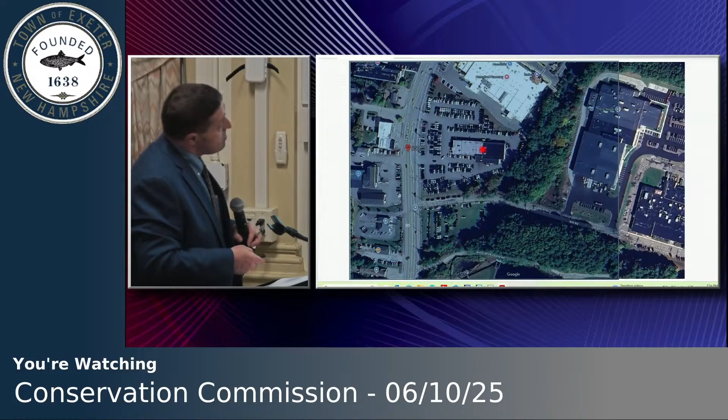Here is the 3 lots all in one survey. As you know, they originally were planning to put a building in here. There was discussion because of the reservoir here and any water that might come down off of that. So they pulled that building off the proposed plans. And now we are proposing to put a building in this area here.

It's another, the preliminary site plan. So this is showing the new building. You can see right here is the existing building with the hash marks around it, overlaid on this preliminary site sketch.

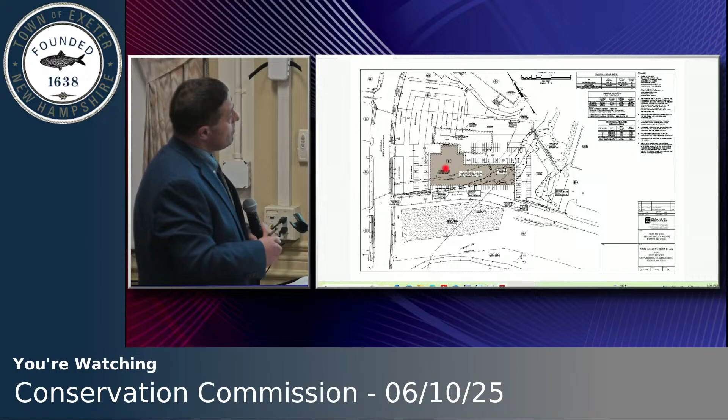This, to minimize impact, they are planning to make this a 3-story building so that instead of trying to expand further, we will have sales in what would be almost like a basement building, so that as you come up Portsmouth Avenue, you'd be able to see the basement part of that building where they could have some sales.

And then, I would assume that would be trucks, dealership trucks and possibly. And then the Jeeps probably would be on the first floor, and then they would have corporate offices on the third floor, or the second floor, I guess it would be. This little bump out would be for drop off for service, and the rear of the building would all be bays that would be for maintenance.

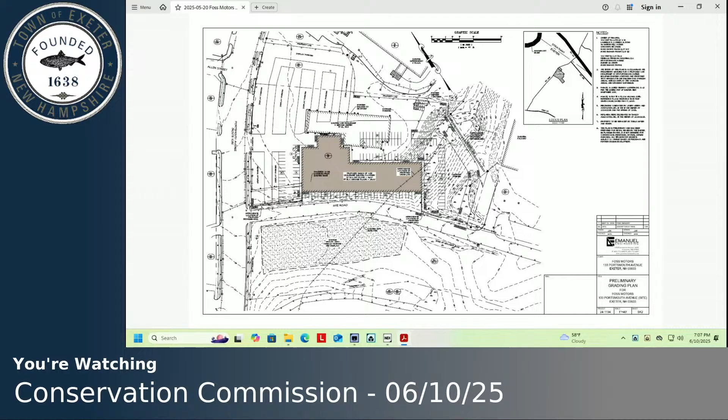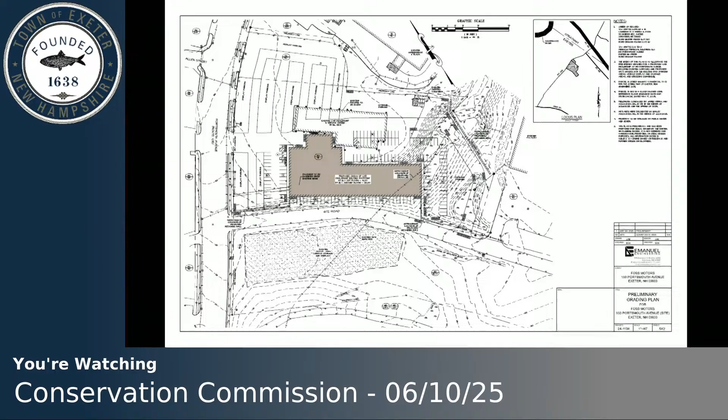So the reason we're here today is because of this wetlands here, and then the man-made wetlands that is the road driveway ditch on this side.

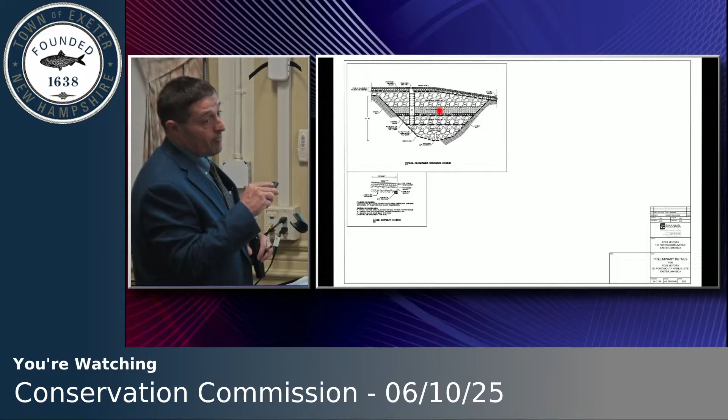And this is what we're proposing to do in the rear ditch, is to design what would be the largest sand filter, to my knowledge, in the state of New Hampshire. The swale in the back is approximately 20 feet deep. We would have stone at the bottom for overflow flood stage storage. It would all be in the bottom. We would have stone on top, so that we could have dry wells and collect the water from the ridge on the site. Let me go back.

Essentially, the site has a ridge that runs around in here, and the water all runs to the rear of the lot. Currently, none of that is treated. So all of that water just flows into this wetlands and then is piped from about here right into the sluiceway exiting the waterworks. So right now, none of that water is treated. What we're proposing is to take that water from this area of the lot and put it into this large sand filter

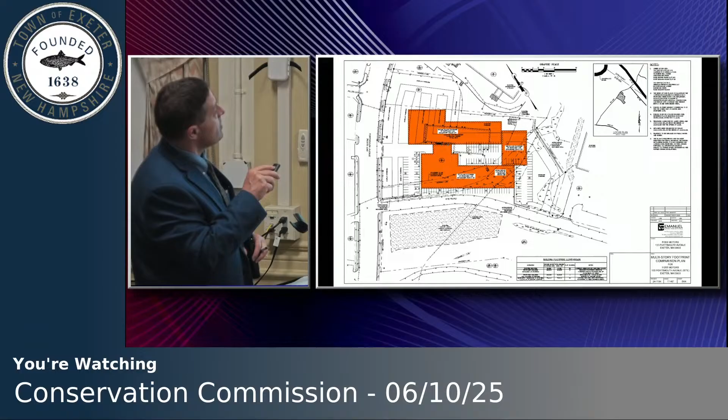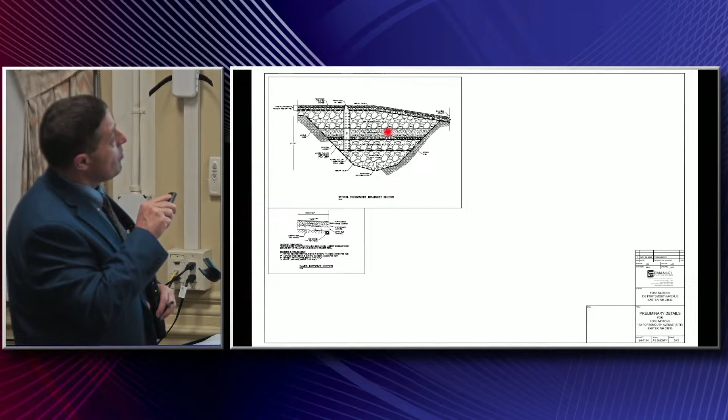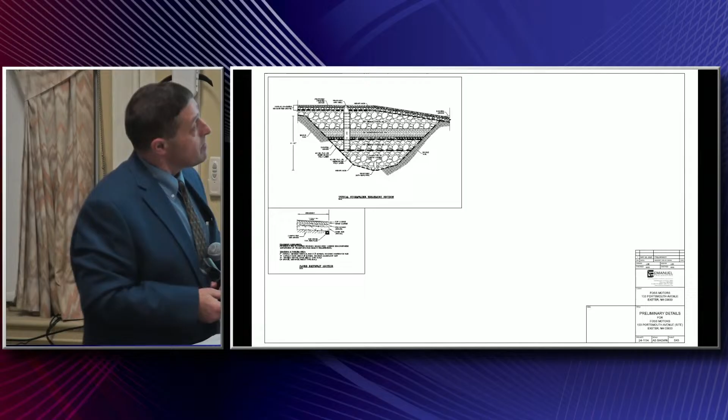here. Traditionally, biofilters are between 18 and 24 inches thick, so we're proposing a 36-inch sand filter. So that water would all have to work its way through this biofilter, where bacteria would grow and treat the water. We feel that this would be a far superior method of treatment of the water that's currently being just dumped into the drainage swale that's behind the dealership and then pushed through the pipe under the former Sylvania parking, or the driveway and lawn that was daylighted into the existing outlet of the reservoir.

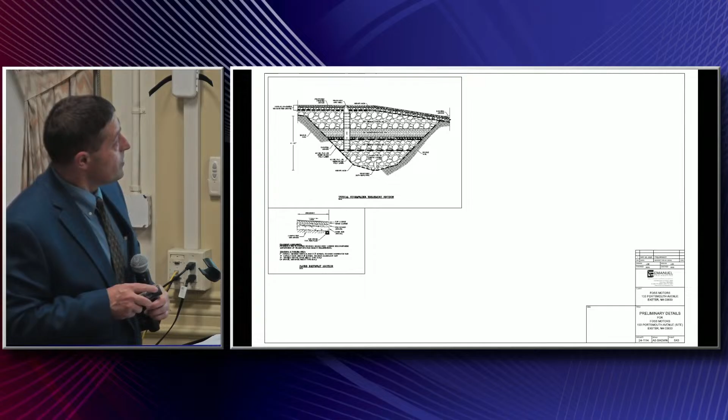So at that point, that's our preliminary discussion. I can talk in more detail of that, but I just wanted to bring that to you and have some discussion about what your thoughts are and where we could work with you on what your thoughts are on the bioswale and how to best move forward in getting the dealership that they need to stay here in town.

And so just for concept, so that it's clear to the board, this is a conceptual design. Your comments to the applicant are non-binding, but it's an opportunity to provide feedback. You're not held to the comments that you make here should a redesign come back. It's really just an open discussion about what you see. That's why we wanted to come here early, just to have some discussion, show you what we were thinking is a way to mitigate the wetlands disturbance that's proposed.

I have a couple questions. Sure. You mentioned a 73,000 square foot building that was down below. Isn't that much larger than what was proposed before? Wasn't it a 20,000 foot? Yes, 73,000 was a combination of the addition and the 20,000 square foot. Oh, okay, all right. So you're still talking about the 20, okay, thank you for clarifying that. So that's 73,000 square feet, and what we're proposing is 83,000 square feet total.

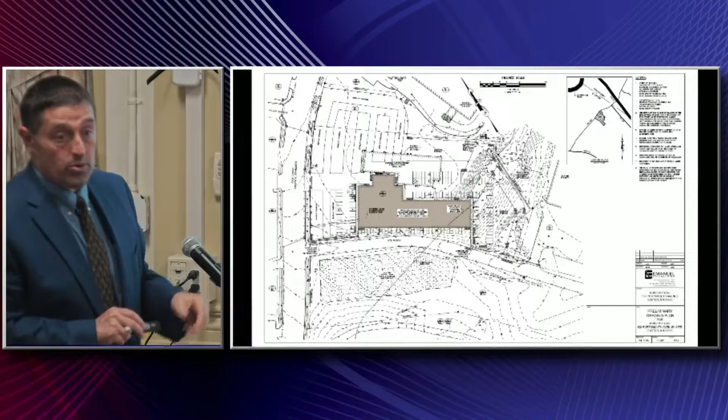Okay. And that's why we're doing it, but in a much smaller footprint. We're doing it in a 36,000 square foot footprint, but by having it multi-story, we're trying to minimize that impact. So, I mean, there is a wetland there. Absolutely. I think you mentioned that the wetland impact is how many square feet? About 15? Honestly, I don't have that off the top of my head, let me pull up my plan and get that for you.

Of the natural, it's 15,009. The man-made isn't totaled, but total with the man-made, so someone could do the subtraction, all wetland impact is 22,050. So then, 7,041 of man-made. And that's direct wetland impact. Correct. Not to mention the buffer impacts. Do you have square footage on the buffer impact?

I don't think we've done that at this point. We're all just in a preliminary stage. Okay. I'm just trying to get a sense of it. Absolutely. So it's about a half an acre total. All right, because it seems like it goes halfway through your new building there, the buffer? Yes. So this is already previously impacted, running right around here. And it definitely would go back into this area.

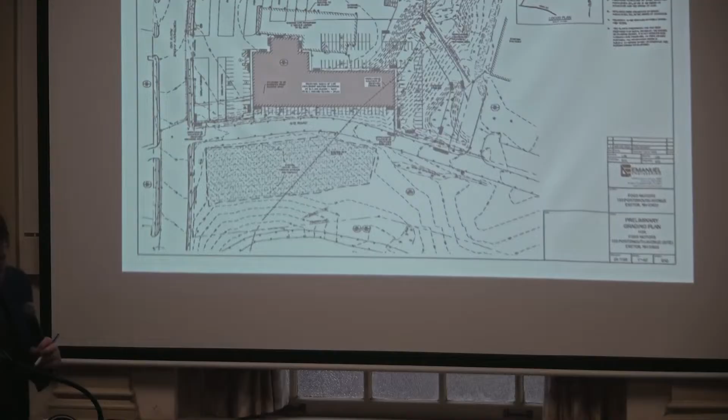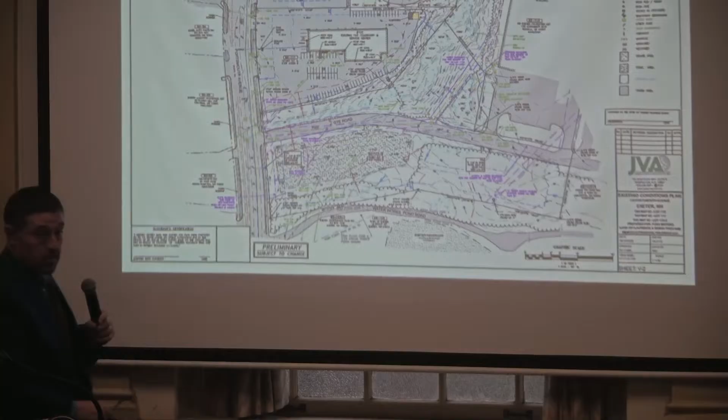Let me pull back to, the buffer here is shown as the red lines. Yeah. So most of the buffer is already an impacted area with fill and pavement. You can see here, this is the extent of the previously impacted buffer. Right, because that's a slope. Yeah, that's a man-made filled slope from the parking lot.

What is the wetland itself? I remember walking the ditch, the man-made wetland, along that road when we did a site visit last year. But I don't think we went up beyond to see that wetland that's impacted there. There's a drainage ditch that runs down through there. We went up and looked at some of the repair work that was done previously for Hannaford's. It discharges to the top of that.

Starting at the old Route 51, when the state rebuilt that, it's all been regraded and rebuilt down to basically our property line, about here, all done with riprap and gabions. They rebuilt behind the Hannafords when that was put in. We went out and looked at that, and it's all been touched as part of the drainage swale that runs off of Route 101 and the old Route 51, the start of the bypass. Holland Way. Yes, I'm sorry. So that's a drainage ditch, you're saying, that wetland that you're impacting.

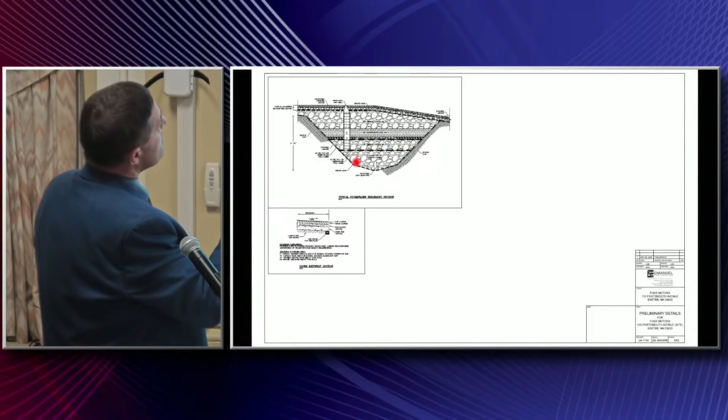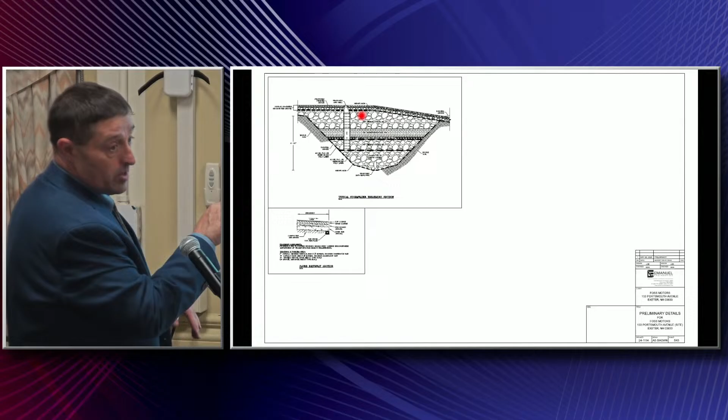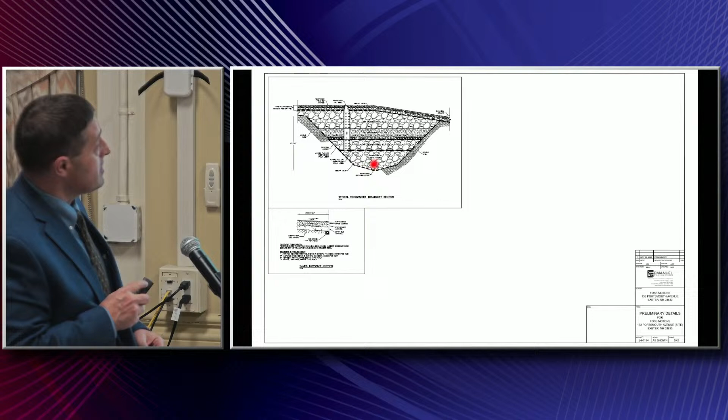So, you look at this, this is actually a pipe, the extension. We're gonna make that perforated. Most of our bioretention work is done with perforated pipe, so the water can flow into those rocks and then slowly drain out. That's the water that's coming from upstream. And then any water coming off the parking lot and in the new areas would go into this rock area, which would be a storage. And then we'd put in a 3-foot sand filter to treat the water. So it actually has treatment to it before it goes into the pipe where it's going to daylight down on the outlet of the reservoir.

Wasn't the new parking lot on the south side also going to drain back into that area? I honestly, I didn't design that, so I can't tell you. Do any of you guys remember that? I probably have a copy of it if we needed to. I believe it's all going to be porous pavement. Yeah. So porous pavement traditionally has a similar section, but much smaller and much thinner. Because I remember that head wall you're coming right up. Yeah, it's going like up to that head wall. So how does that all mesh, I guess?

So the town planner did receive a field modification request to change the outlet. I don't know if a decision has been made on that. I don't know the status of it, but there was a request to do some changing there. So, okay, so it is going to play some role in what happens here. Yeah, I apologize that I don't know this for sure, but I believe it was outletting directly instead of outletting north of the GTE road.

So by having this storage, we're creating the storage so it'll slowly go down through the sand filter. This will take hours to percolate, and that makes it so it's delayed, so it comes out at a slower rate than what goes out today. So we will actually reduce the flow leaving the site. We haven't done all the drainage calculations, but I've never designed a sand filter with 3 feet of sand. The most I've ever done is 2 feet by AOT regulations. So we were planning to have it a little thicker because of all the extra pavement that we're going to be pulling towards it. And then making it, like I said, an extra thick stone layer for storage above and below.

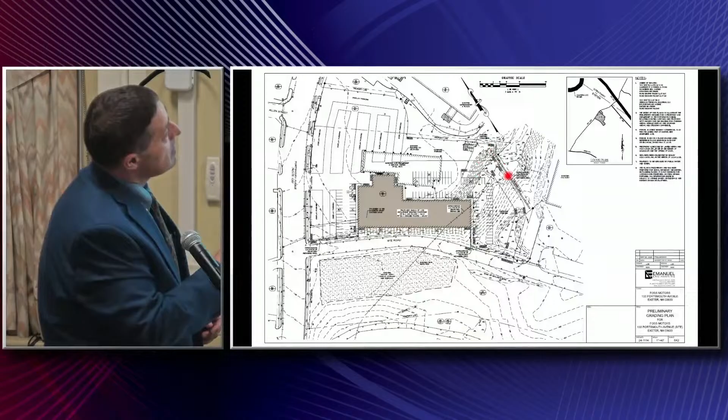Bruce, it's not entirely clear to me where physically that is on the plan. Can you point that out? Sure, actually. So this whole area will be the sand filter. But all of the notes say storage. Yeah, this is under a parking lot. Okay, gotcha. So we're trying to make it so that it's actually being used and treated so that we can use the area to its fullest extent. Because we're going to have access here for back and forth traffic with the dealership and access around the building. This is going to be down at the level of the driveway here. So this is all drive-in into the basement or first floor.

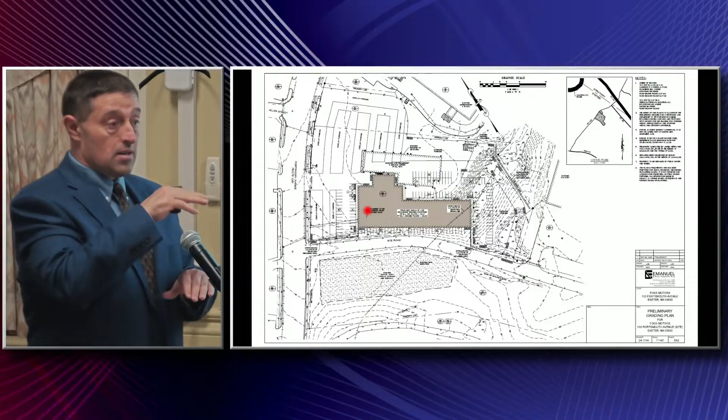And the other 3 sides are all going to be at the second floor elevation. So first floor, second floor, third floor. Yeah, I think it is. Maintenance. So those standpipes are going to be coming up through the parking lot. They're like catch basins, basically, but they're dry wells so that they can release the water and spread it out through the stone basin underneath.

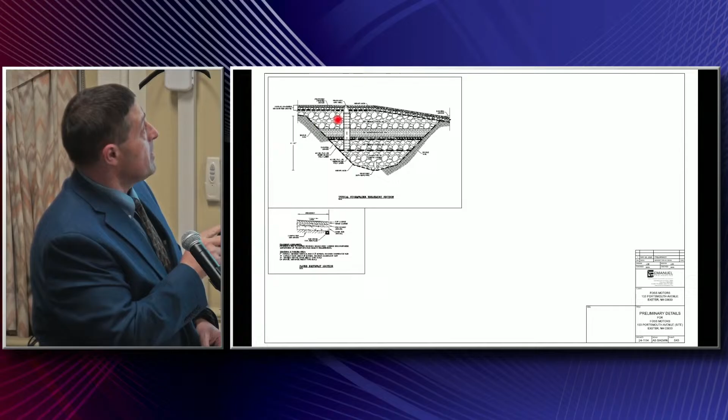Now, what filters the water so that eventually that sand doesn't get silted in? Well, there's a couple things we'll have to do through the full design process. We'll have to put some sort of inlet protection up here. But the rocks themselves are the biggest chunk of that, it won't be able to get down to the sand. But fine particulates wouldn't go through that? Well, we'll have to work on that at this stage right here and have a sump of some sort into this dry well. It may be that we put a second catch basin adjacent to it and then have the catch basin itself be with a sump and then have an overflow into the dry well.

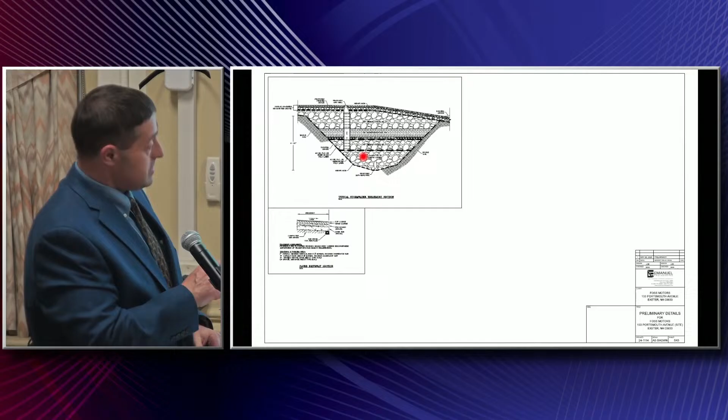Like I said, we haven't 100% designed that fully because this whole system, we needed to get some sort of, we're going to the planning board also Thursday night. So we think this is a pretty unique system.

And wanted to get some feedback from the commission and the planning board before we would go forward with a full design. Now, you said this will potentially be the largest such structure. Yeah, I don't know of any others in the state. There could be bigger ones. I'm not trying to say no, I've just never heard of one that's 20 feet deep. I'm just curious if there's a smaller one that you're familiar with and how that is functional.

We design these on a daily basis. This is basically a porous pavement section, but just so much bigger, that's all. It's just a scale so that it gets more time for treatment going through. Additionally, if we have 3 feet below it of stone, we have not gone to alteration of terrain yet. We might need to do what they call an ISR, which is an artificial wetlands that would be below grade for denitrification. So we'll be working with DES on that.

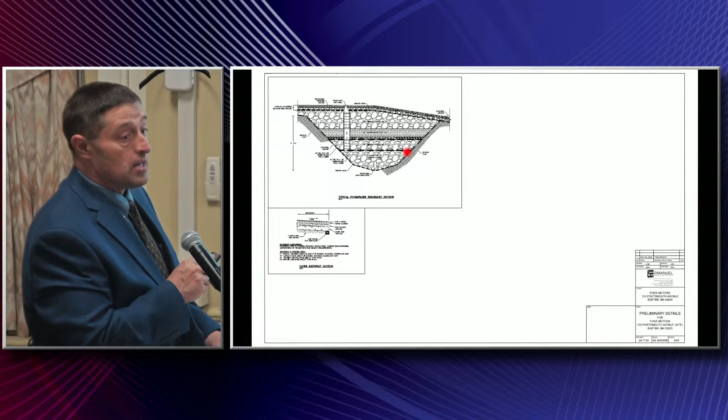The sand filter is an aerobic process where we take nitrogen and convert it into nitrate. And then if we need to have a denitrification process, that would be here and that would be anaerobic. And you do that with pool liner, basically, is a simple way of calling it. And you let the water sit in that, and it goes anaerobic. And then the nitrogen will go off as nitrogen gas back up to the atmosphere, and you will have cleaner water going back out.

Like I said, we've designed it so that we could do that. We just haven't shown that on the plan yet because we'll be working with DES on that part of the design. We've done similar design for TurboCam up on Barrington, up on Route 9, on a recent facility that we did there. I would say our office park has very similar style systems. We've done it on multiple car dealerships around the state. Almost every system that I design at this point, I'm putting in a bio-treatment system so that we can really clean the water.

If you just put it into a pond, the way traditional systems are, you're really not, in my mind, treating water. You need a nitrification process where you can have bacteria just like we do with leach fields. That's the surface area they get with a sand filter, the surface area compared to the volume. You get much more surface area running through sand than you do with rocks. The traditional septic system has rocks in it. If you think about something the size of my fist or the tip of my pen, you could put so many more of these tips in that area, you get a lot more surface area.

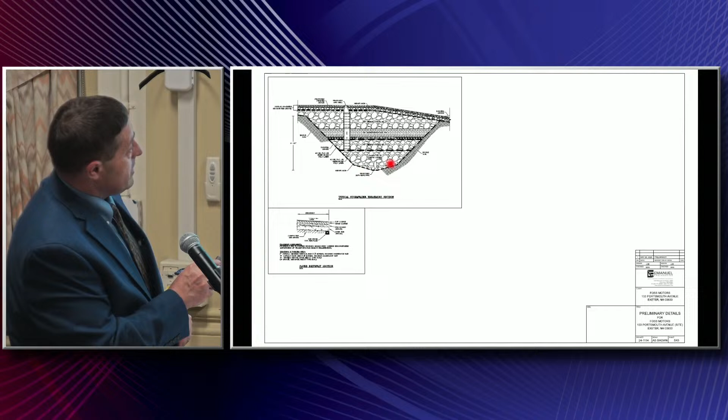Just one quick question. The sand filtration system, as you're calling it, will the drainage from above Holland Way come through that filtration system? It will not. That's why there's a bypass underneath with the pipe, by extending the existing pipe. But in a larger storm event, it would come into this rock area where bacteria would also grow, just not as efficiently as the sand filter itself.

Okay. I was hoping to get some water purification from the drainage to improve that water quality. I thought if it was able to utilize the sand filtration system, it would remove more nitrogen coming from the drainage from the north side of Holland Way, which would vastly improve the water quality entering the sluiceway, which gets into Wheelwright Creek, which gets into the Squamscott, which gets into Great Bay. All trying to reduce nitrogen. Thank you, though. Appreciate it.

I was looking at the third hole at Exeter Country Club, looking into that creek over the weekend, thinking about that.

Yeah, I guess that's my concern too, is you are sort of extending the culverted section. So we already have a long culverted section across that parking lot and down across Waterworks Pond Road. In general, we want to remove these long culverts rather than add additional culverted sections.

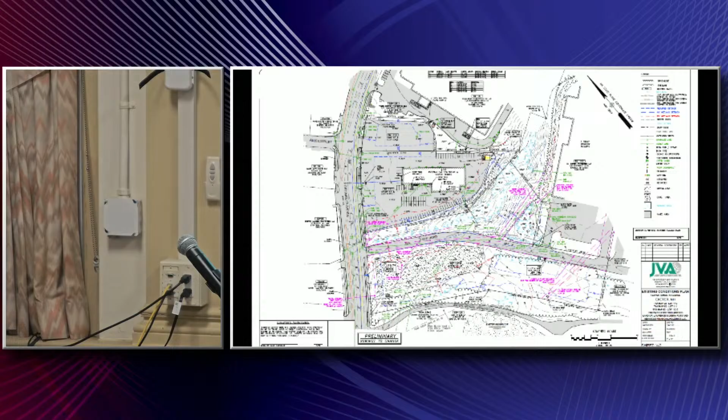I think there might be some grading. There may be some minor shoreline grading. Yeah, I guess. There's a little strip right along the edge of the road, the driveway. Here, let me go back to see that. One of the lines is the shoreline. So right here is the shoreland. So there's a little strip right here. Okay. But it's very minor in this versus putting a building here at this point.

Yeah. Like I said, Foss Motors is trying to stay here in town, and they're not making more land, and unfortunately, they need to expand to stay here. Just out of curiosity, I'm sure you considered this, but that former Toyota property up there, why not do some building up there away from the wetland? Because they still need to have the parking. Right. And this isn't a big enough area to put in the size building that they need.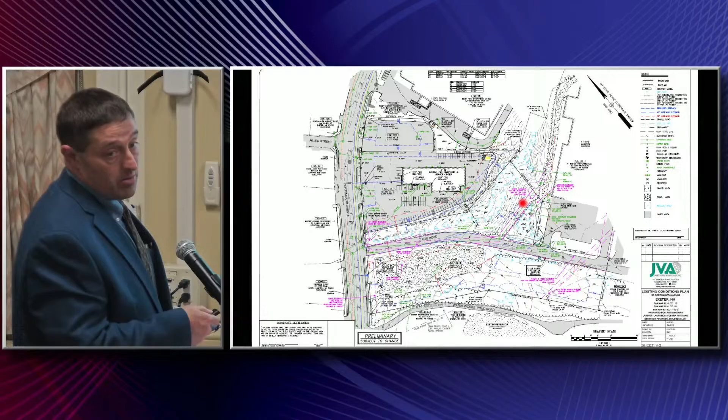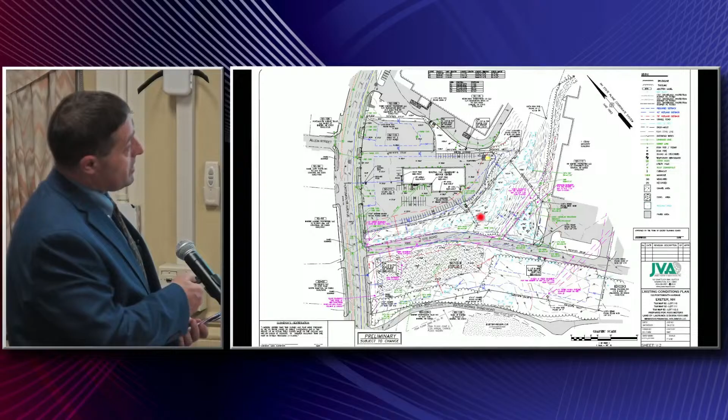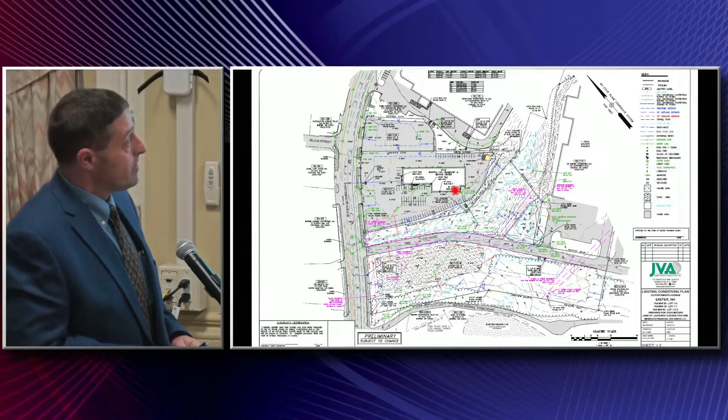Like I said, we looked at just building here, which would also impact the wetland. But the problem is that's almost gonna put them out of business, partially because they would also need to do all of this area, and then you'd just be putting parking over this. So it's a combination of environmental and business. They need to be able to build, and by building here, they can stay in business in this location during that construction period. It's just a practical part of staying in business and building a facility that's big enough to keep them in business here.

Am I reading the plan right, that it essentially paves to the property line? Correct. So in the rear, we're putting up retaining walls. I find that retaining walls, when we deal with wetlands, are always better because you don't have the fill extensions and you create a barrier so stuff doesn't get creeped over it. As I've seen on many sites, fill gets pushed over. With a retaining wall, both town officials and property owners have a hardened location delineated, so the wetlands that continue up do not get touched.

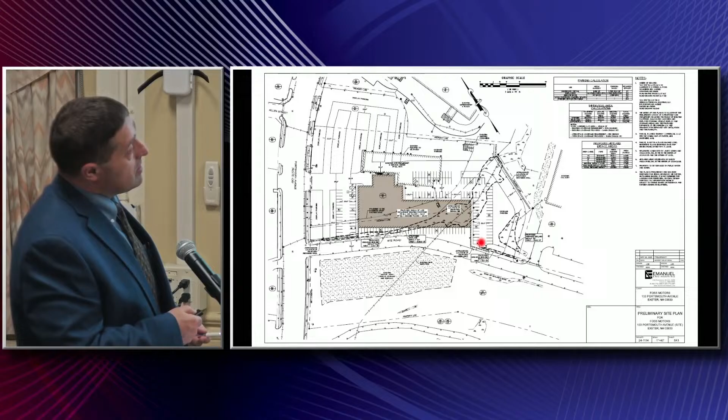We have a little bit of a gap here. There's an existing man-made pond here that is the drainage from the renovated building that's here. We're gonna be taking that and incorporating it into our stormwater system as well. When I went and looked at it, it is not being maintained. It's overgrowing, and that is part of the other reason I like to design these underground systems.

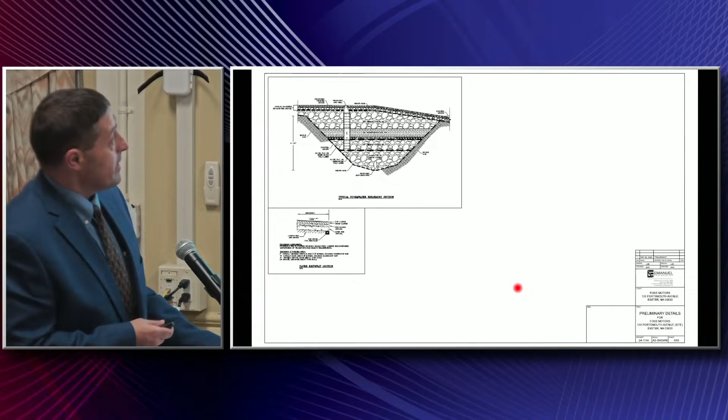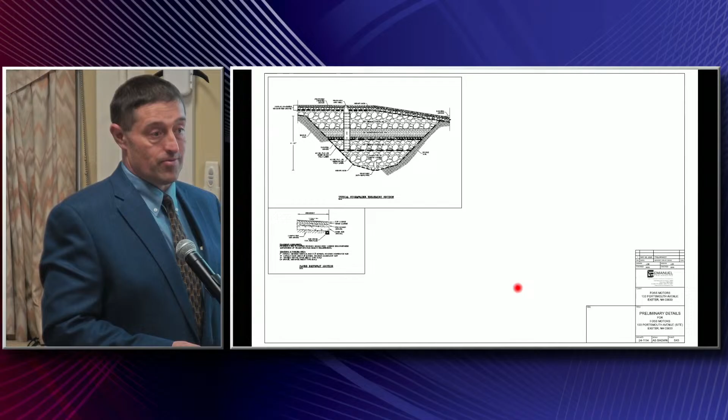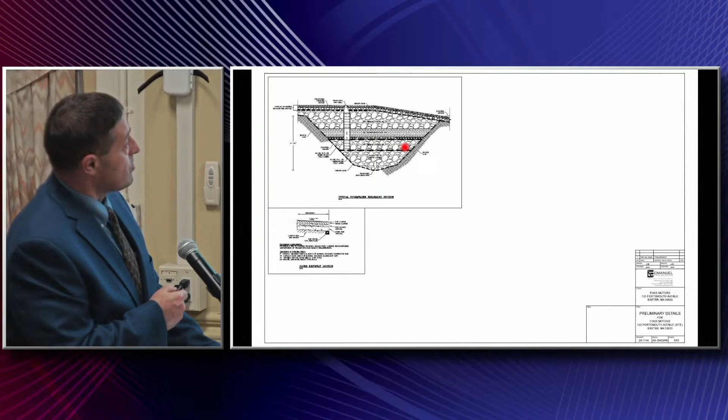Nobody lets trees grow up in them, and the trees don't fall over, tear out berms, and cause flooding issues. They don't have mosquitoes growing in them that create triple E issues or other infestations of new sicknesses. So I like this because it's an enclosed system that has better treatment and doesn't create a surface wetland

that causes other issues. If we create an underground wetland for DES, it's going to be in a controlled environment that will go anaerobic and treat it for nitrogen. We won't be creating a spot where mosquitoes and other bloodborne pathogens can be created. There's plenty of good wetlands in other places that can do that. I just don't like creating them artificially. Sure.

And that man-made wetland in the bottom right-hand corner, that wasn't created for any of the current development that's there, correct? That's like an artifact of the past? It's been there for quite a while, so I assume that it dates back to prior to the existing development, but I certainly don't know that for a fact. Yeah, certainly not to the CNA, because that's on your land there. Okay.

Seeing that retaining wall just got me thinking about what is presently done for snow storage and what's proposed to be done for snow storage? We haven't completely designed, like I said. I would assume that part of this back parking lot would be used for snow storage. It could be taken off-site.

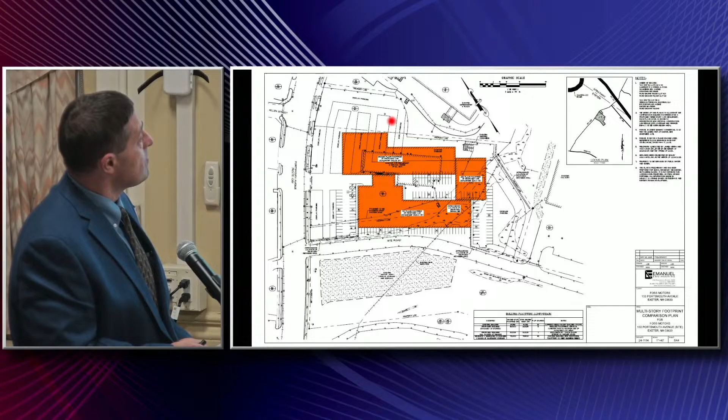Currently, they put snow all around this side of the building. So I would assume that would continue as they have been doing. Okay. But it definitely won't be going over the wall. Yes, we can put that on the plan. Okay.

Yeah, it's a lot of wetland impact. It's hard to stomach a little bit for me because there's no avoidance or minimization here. It's just you're basically filling that entire wetland, turning it into a parking lot. Correct. Parking lot and building. So I get what you're trying to do, but at the same time, it's a significant ask to go along with this.

Yeah, I'll just put my thoughts out there, I guess. I think like you mentioned, it's sort of a complete removal of what's there. I don't think I would recommend trying to claw back little pieces of this or that or the other thing, because I would say the value in any one little sliver of piece just isn't there if you take away the other pieces.

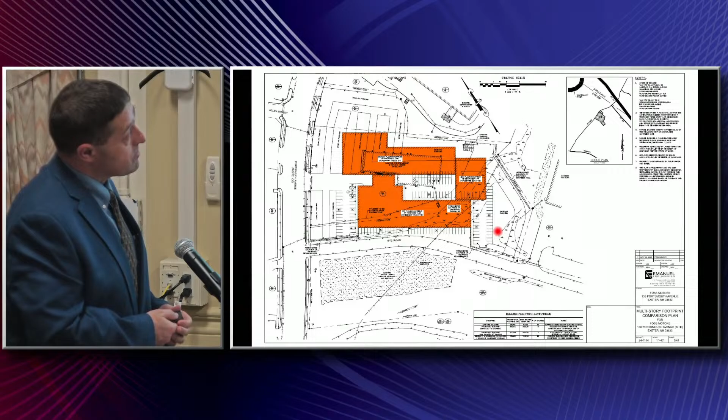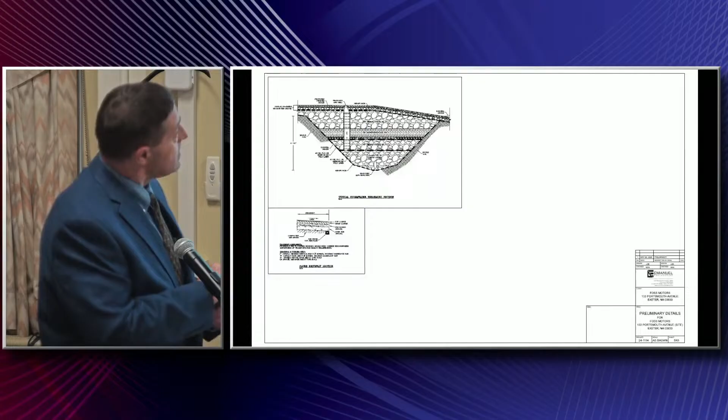Like I said, there's a high point that runs through the site like this. This is all existing pavement that runs out towards the road. So everything in the rear half that runs down and into this current wetland is where we're looking to treat. And that's why we have a thicker rock section in the top than what we normally would. Traditionally, this is 6 inches of stone, and we're proposing somewhere around 3 feet.

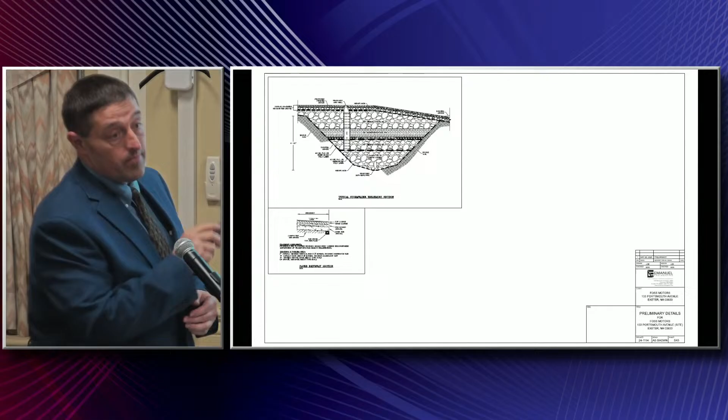Would that include anything coming off the roof of the building? So the entire new building? I want to be careful saying entire until we get into full design, but yeah, as much as we can. The intent would be to drain that. You're going to keep the grade pretty much the same, so you'll still have that ridge flowing in two directions. Correct. But you're going to try to capture the roof water. Correct. And send that back.

Alteration of terrain makes us treat all roof water. Okay. So we'll be treating it one way or another. If we can't fit it into this or make it flow there, then we'll have to add additional treatment in the front for that roof.

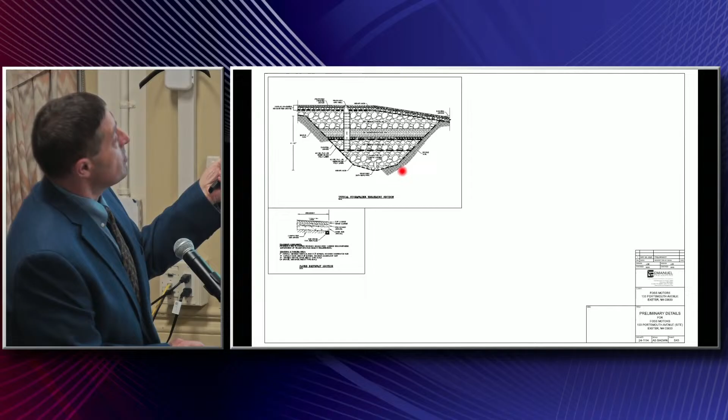Would this send more water? Would it increase the flows through the head wall potentially? No, because of the attenuation through the gravel, by making that pipe perforated. What we like to do is make these perforated so it can also flow to the stone. If it's dry enough, the water doesn't just stay in the pipe, it'll spread out into the stone. And when the water is down in the stone, it'll percolate down into the ground.

Right. But it would be doing that now, because it's in a wetland. Correct. But by holding water up on top for hours, if not sometimes a day, it comes down slower and has more time for percolating and infiltrating down below the pipe, because it's going to drain that water over a longer period of time. Yeah, I guess I get it in theory. I'm just curious how it actually plays out on the ground at this particular site. I believe you, but...

I'd be curious what the outfall of that culvert looks like in that part of the site. I think we want to look at this system. You're significantly modifying it, and you're now creating this giant culverted system. Part of it is perforated, but you're expanding this head wall up a significant way. So I'd want to make sure that whole system makes sense and meets the current design. If that pipe is hanging at the end, why are we building this giant $1 million new thing to have it be this crappy outfall?

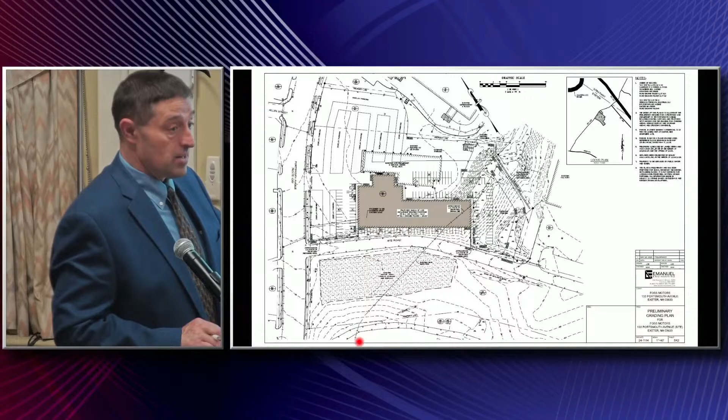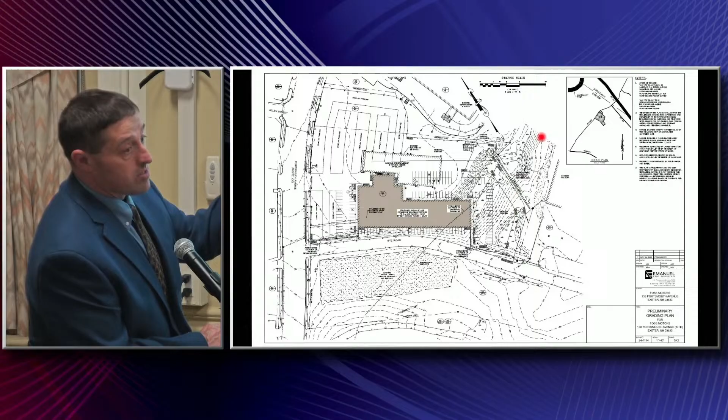I don't know what that outfall looks like. The downslope, you're saying? Yes, the downslope. I'd like to think a little more holistically about this system. So the downslope is off-site, down here, right? And this will be a closed system all the way. There's also pipe underneath 101, under Holland Way, and it's all in man-made structures running down through here. Even behind Hannaford's, it's running through gabions and rocks, just like what we're planning to do. We're just doing it somewhat enclosed in this area.

Yeah, I guess that only furthers my concern, that this whole area is like this. I want to make sure it works. If you're messing with part of it, we should make sure the whole system is working. Because why are you investing $1 million if it's failing downstream? That's just my thought in the moment. I don't know that you would have authority to, but it would be worth the town looking into this whole area, or at least going out on a site walk and making sure it all makes sense.

Anybody else? Oh, Bill, you're muted. There we go.

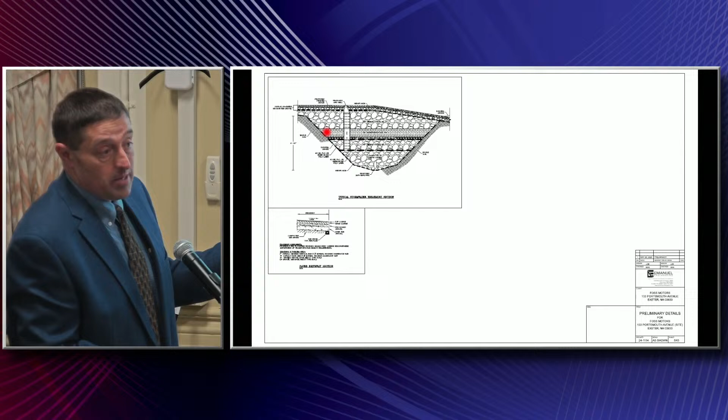Does this system take a lot of upkeep? The system itself does not. What might take some upkeep is the sumps that need to be cleaned out above this. As I said, we haven't designed that system. There's several different ones that are readily available. But it's just cleaning out the sumps that are also part of this system.

And would that be Fox's responsibility? I would think it would be their responsibility to maintain their drainage structures, just like it would be anybody's private property drainage structures. Well, yeah. They installed a beautiful system up at Hannaford's before Hannaford was in there. And the DES gave it 5 years, and then they said they're finished with it, and now it's shot. It's all overgrown and it doesn't work.

That's why I like these biosystems, Bill, because you don't have the vegetation that destroys them. The vegetation is great in a lot of places, in a lot of ways, but anytime you get root systems going into a treatment system, those roots disturb the pipes, they disturb the layers, they cause short cutting through the treatment system. So that's why I like this type of system, because it doesn't have any of those biological impacts from things growing in them and on them. Okay.

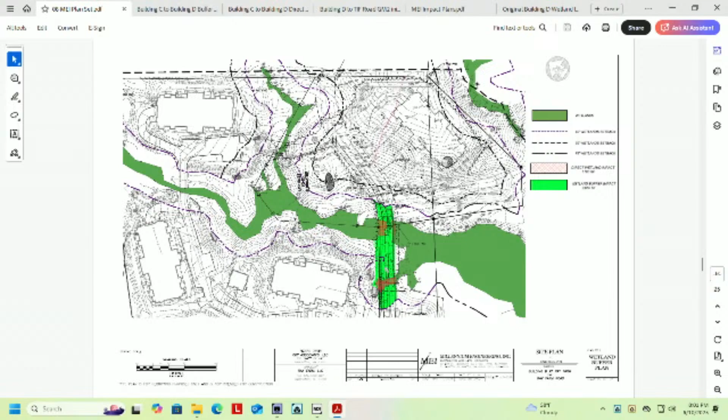This new design, I'll avoid the word concept because it's real, uses the TIF road, which I think was previously considered the preferred access into the rear of the site because it will avoid additional duplicate or secondary wetland impacts affiliated with building C to D, and I know that was a concern previously from the board. We're here tonight to try and get recommendations for both the wetlands and shorelands impacts. This is the wetlands buffer plan, and then the shoreline buffer plan, which looks something like this. The comparison, I will let you direct that conversation, because if I stand up here, I'm going to confuse the world or give too much information. So I think it's better to do directive questions.

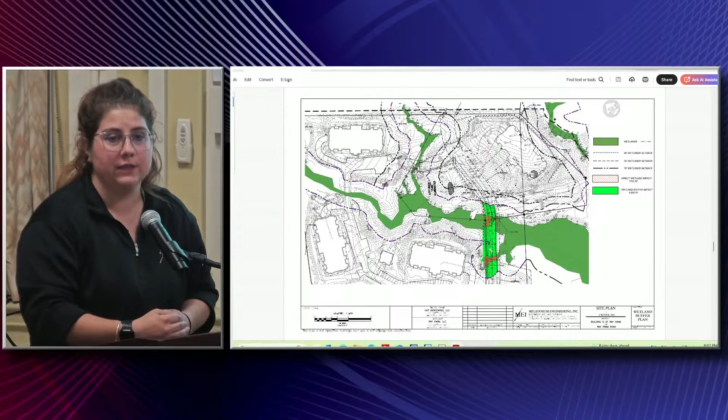But again, the general idea of this revised site plan is it's the same building location from 2022. It's a revised access way. This continues the town portion of the TIF road that already exists, so the town's already accepted a length of right-of-way. It will continue that and then taper it from a 28-foot cross-section down to a 24-foot wide road width for the duration of the driveway through the same area the TIF road previously was going to use, and then derives the rest of the impacts from the parking required and the additional access requests that were required for the site.

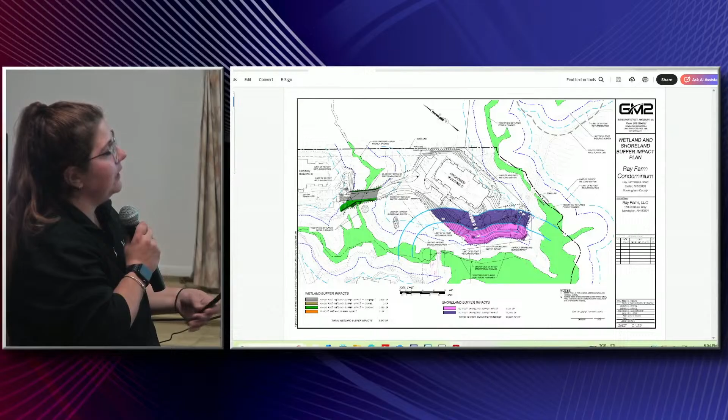There's a couple of reasons for the parking lot reconfiguration. One being that the requirements on the planning side actually require more parking to be on the ground. There are 36 spaces underneath, and in total, we're in the process of determining, but when this originally started, we really needed 72. So that's the expansion of that parking lot out. And then you'll notice that these impacts look similar from the shoreline aspect, where you're still using this downstream slope as a stormwater feature to help with stormwater management and enhancing the water quality from the runoff.

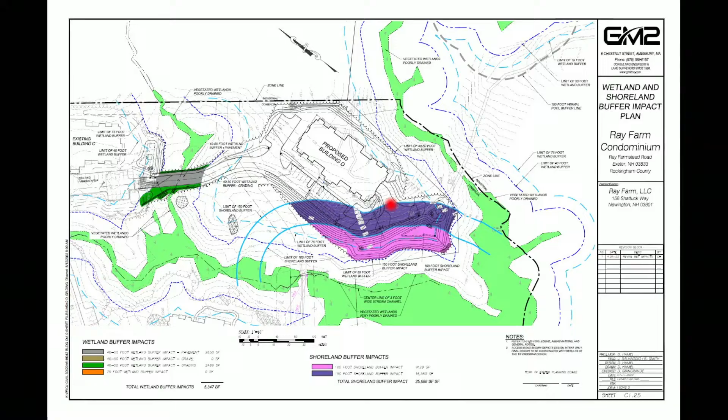In this particular one, the entrance to the underground is on this side, and so yes, there's wetland buffer impact, and that's how we look at it one way, but there's more permanent impervious structure within the buffer in this case because of this turnaround. And so that's something that's different from the new configuration as well. Oh, it's on the other side. It's on the other upland side. Better.

Sorry, I believed that they had created that as well, but they have not. And so if we do, why didn't it go big? Sorry. If we show it this way,

you can see this is the revised shoreland impact plan, where again, here's your TIF Road crossing coming up, and then you have the extension of TIF Road as the main driveway access and some of that parking lot. We still have stormwater management in the 100 to 150 foot buffer, but this entrance has been relocated to the other side to pull it out of the buffer even more and try to reduce that some more.

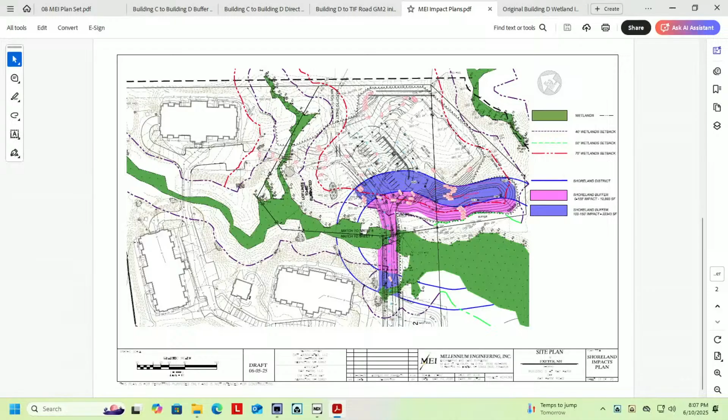Is there currently anything existing on that access that you are proposing? No. So there's a trail, there's a crossing. See how the wetland breaks in the middle of the road right there? It's because there's a trail that crosses there, and I think it's a little culvert or something. Somehow the stream goes underneath the trail section. And there's a lot of trails amongst all those woods. That was a really poor answer on my part, I apologize. So there's lots of trail, but that's it really.

Yeah, you got where I was going with that question. That's why the wetland looks kind of funky in the application. That discontinuous moment is because of an old crossing. I don't know who put that crossing in, but it's been there a while. Wasn't me. Yeah, so you can see the pink between the green is the culvert crossing that we were standing on earlier today, for those who were at the site walk.

I just wanted to add that it is ostensibly a trail now, but there is a culvert in there. There's a metal culvert. Can you introduce yourself? Sorry. I'm used to being introduced in the beginning. Brendan Quigley, I'm a wetland scientist in New Hampshire with Gove Environmental Services.

Andrew will probably remember that I too was involved since the very beginning of this, so I have some insight to things like this culvert. It was originally some sort of access road to this property in the early 80s, I believe. So it's more than just a trail crossing. It is a trail now, but there is a metal culvert in there. I think I said there was two. I might have been wrong about that because I couldn't find the existing conditions plans that I looked at. But there is a metal culvert in there.

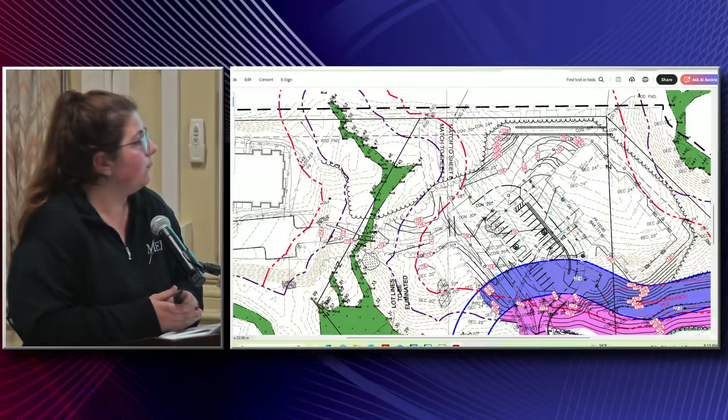And that is about 3,500 square feet of permanent impact within the shoreline buffer zone that will be reduced and potentially can be removed. And so we're trying to realize those changes that may still need to occur prior to fully defining the numbers on both CUPs. Okay. This is the first time I've seen this. So is there land conserved in this? There must be some land conserved in this whole thing? I don't think so.

Well, there's the open space between the 4 buildings that's conserved. There's no separate additional easement that would be made. So when you say conserved, it's conserved by the condominium, in condominium rules? Right. It'd be on the lot as open space. Okay. That would retain some of those areas that are used right now for mountain biking and things like that.

And then my other question is about that sidewalk that connects the 2 buildings. Could you talk a little bit about that? Because it looks like it's going to be 6 foot of pavement connecting one building to the other. Right. So the idea, in theory, is wonderful. And what I've come to realize a little bit more, especially after today, is that these impacts are incredibly large for what they need to be. And so what the owner has asked is that we maintain some type of pedestrian access between building C, which is here, and building D over here.

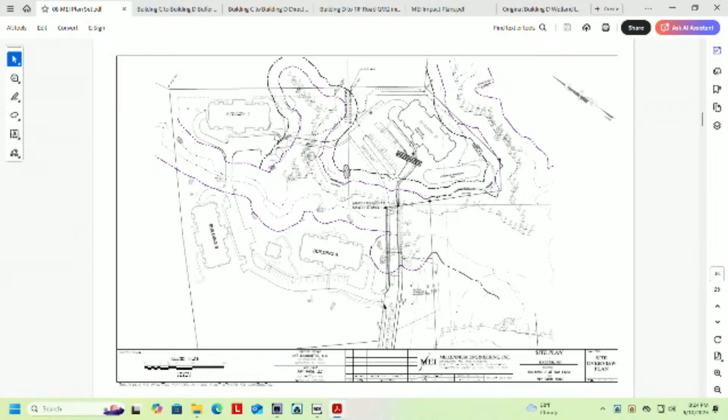I don't think it will go away, but I can't honestly say that we've talked about provisioning for that in what we're doing, because I know what you're referring to is, you come up this way and you go out to Carlisle, but if you come down and around, you end up in the second CKT property, and then eventually that does wrap toward the town forest beyond Commerce, right? Yeah, I think you can get to the town forest maybe two different ways, but through Carlisle, it's more direct to the top of the Commerce Way or whatever that end of that road is.

Yeah, so like I said, as far as to the C3I property, it leads you out to C3I. Yeah, I'm saying the wrong street names, I think. It's okay. No, Commerce is right, because there's the driveway for the cell tower. Right, you end up getting out, you can go from here up to that driveway to the cell tower and out to C3I. Yeah. So people use this, so people will cut through.

Right. I don't anticipate that there will be any restriction preventing people from continuing to use it once active construction is complete. Obviously, there's some safety involved there. But after the fact, I believe it will stay the way that it is with the ability to bike and walk and whatever else through the paths.

So just back to that stream for a second, because I know that it's perennial, supposedly only from a certain point. But as we follow it up, is it pretty well protected by forest? I mean, I guess, again, we're kind of looking at the whole system again, right? Something that shows the whole site. That's existing.

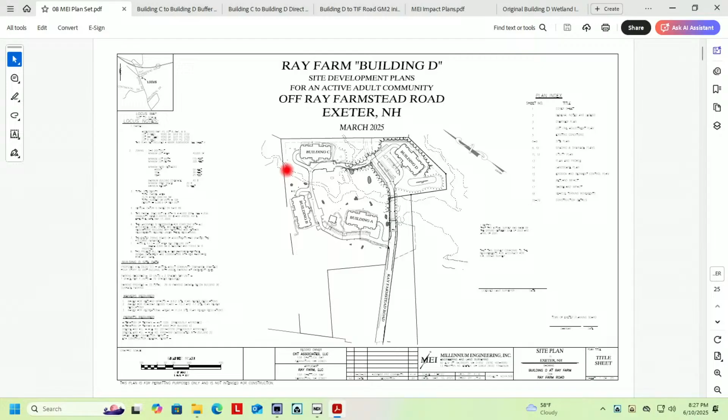So, yeah, where we're talking about now is down here. Watson Brook continues like this, and by the time you get up here, it's really very minimal. Right. But the 2017, actually, I don't know exactly when it was installed, but the initial development located a box culvert here. It's fairly well wooded, and this is a really nice crossing.

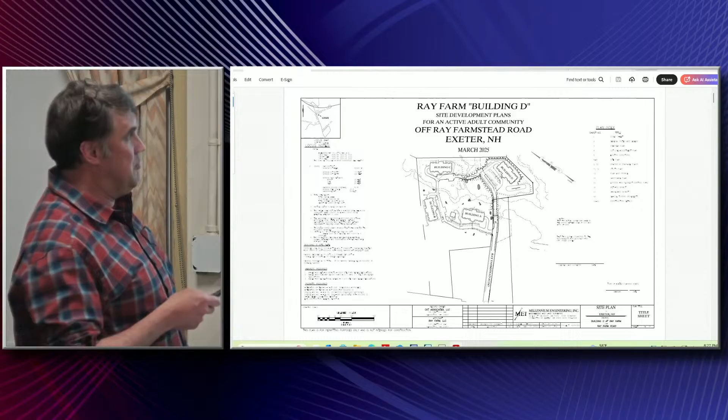Not all of our clients would put that in or offer it, because I didn't even really advocate for it too heavily. It's a nice crossing for a small stream like that. So that's all fairly well, I don't think it's formal protection, but it's part of the open space and the condo. The other thing I wanted to point out is the original location for this building that was down, sort of stuck in down here.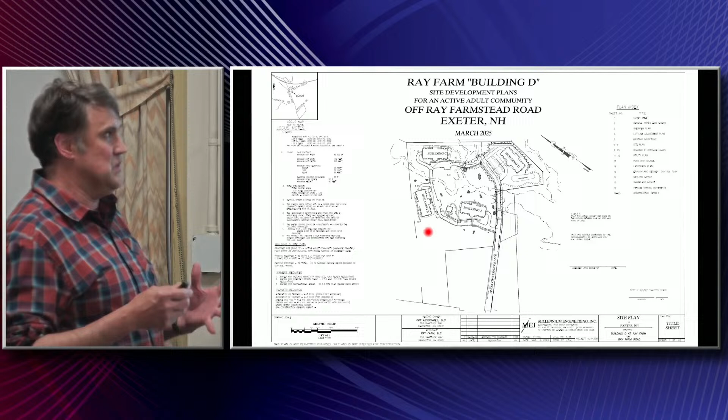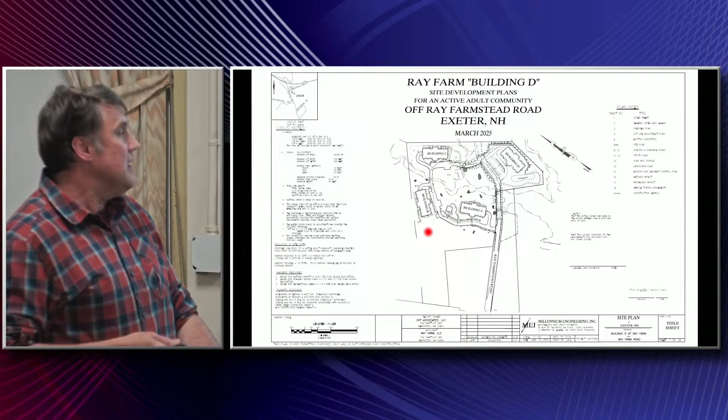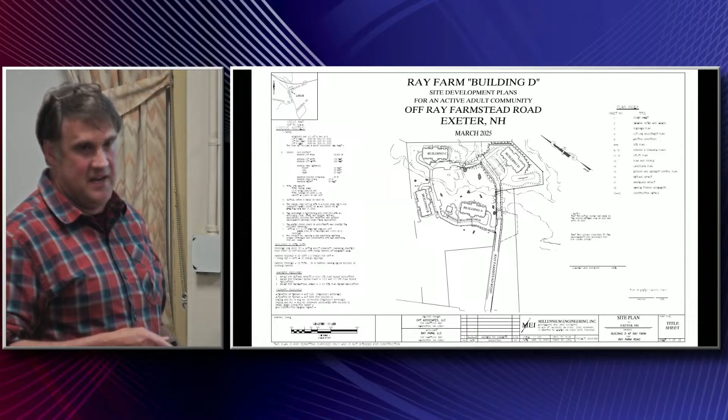And you have this interesting wetland in that area. It's kind of hidden, you might not even know it's there, but it's one of these semi-permanent ponds, small, like a kettle hole wetland. I'm not sure of the origins of it. And now, with the moving of Building D, all those buffer impacts that were to be proposed there are now gone. And I hope I'm not misrepresenting the situation, I believe this is what we talked about in 2022, that will become open space as well. So that will add some protection to those wetland resources.

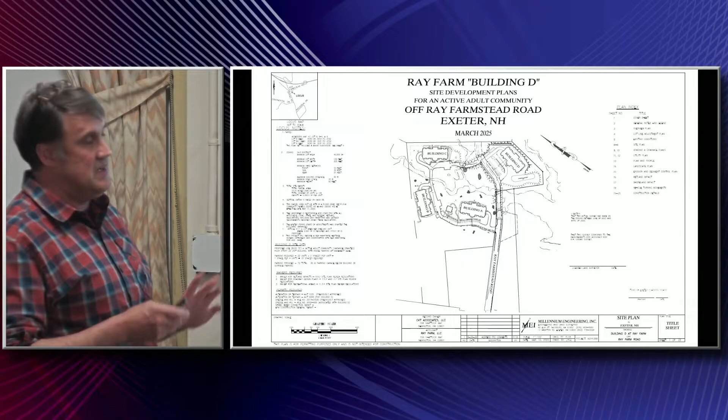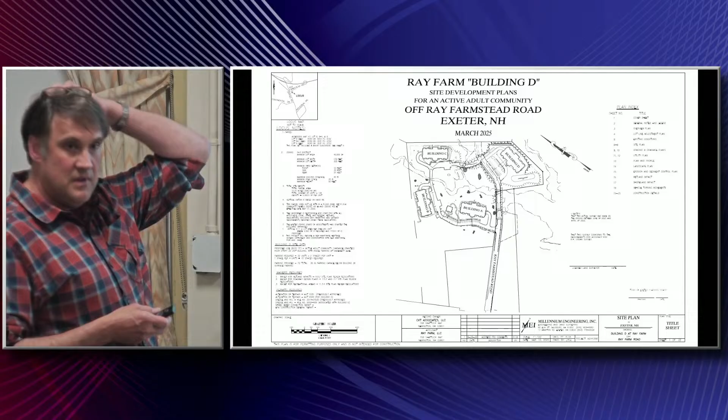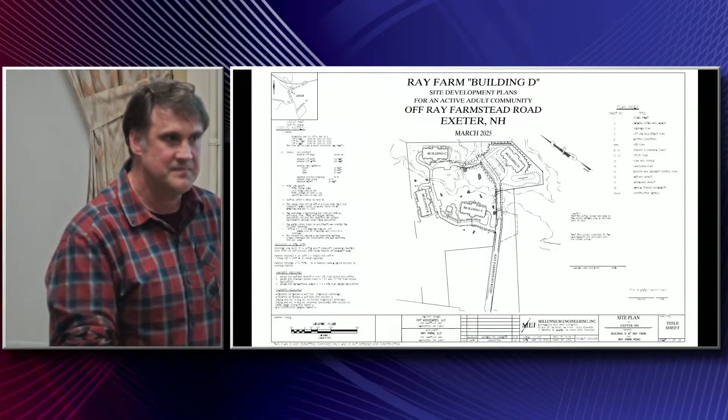Different as it may be from the stream, it is rather unique. It's kind of similar to the area that's across from Mobil. It's a little more visible. So you asked about open space, I just wanted to point that out. Okay. Yeah, that's useful, because there's the concern, would they then come back and say, oh, actually, we want to put a building there, 10 years down the road? That hasn't been what I've heard from our client. Yeah.

The dialogues from the other side of things are that this would be for building development, and then the recreation features that are already there, like the clubhouse. Thank you. The conversation with the planning side is that this is a true relocation. So once Building D is approved and in the process of being built, this is it for the site. The features that are there will remain, and there's no ability to go back to that initial site and create like a Building E or anything like that. It is meant to be A through D, and that's it.

As far as that shoreland buffer impact, is that going to be any type of vegetation? Is that just going to be riprap? No, we did talk a little bit about that in the site walk as well. There it is. The slopes, certainly the outer slopes of the detention areas that you see in pink, and I don't know that detention pond is the right terminology for it. We had always proposed that some sort of natural appropriate seed mix be specified for those slopes,

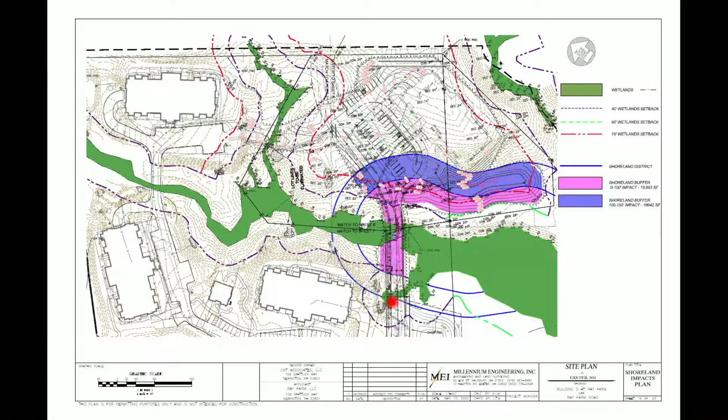More of what that finger is. Sorry, I wasn't on the site walk. That finger coming down that the road goes right through. Yeah, it's just a finger of wetland. So that's proposed to be impacted? Yeah, it is. What is it, forward or back? So the red areas here are the direct wetland impact areas, and of course we'll be submitting a state application for this as well.

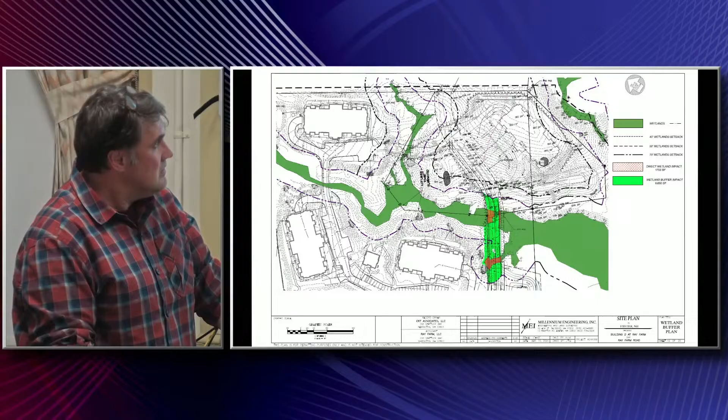Relatively minor, 1,790, so just under 2,000 square feet altogether of wetland impact to those red areas. The crossing is about 40 feet long, again with the box culvert. So a fairly minor wetland application. As far as the state's concerned, I think we should meet all the requirements.

And yeah, that finger, nothing special. In fact, it did get bigger. That's the other thing I want to make clear. These wetlands in the vicinity of this project were all reflagged and resurveyed in late 2021, prior to us being here in '22. So they're still valid within the 5-year time frame. And that was one area that actually, when you compare the old plans, did get a little bit bigger. Can't really explain that one, but there's nothing special about it.

It's just wetland. Well, is there a functions and values in here? There is, right? Yeah, I did. And it's a forest, there's the trail, there's sort of a low wet spot on the trail that I think I remember walking through. Right, that's part of it. I think what's happening there is it is getting some additional water from the stormwater management that was constructed already. So that area is a little wet.

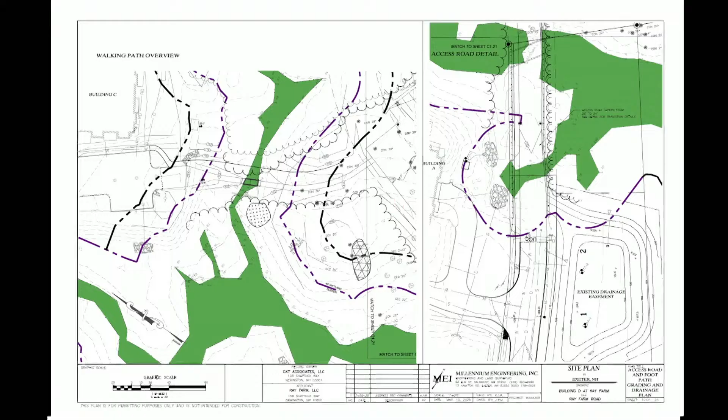I'm hesitant to go back through these, so I'll get lost. Oh, so that's in a different one. But yes, you're correct that the previous proposal went with an actual road, elevated such that it can contain utilities too. There it is right there. So that did have a relatively small direct wetland impact.

But that driveway is too long. That driveway, my understanding is, and I'm sort of at the edge of my expertise here, had issues as far as road length and health and safety concerns related to access, which could not be overcome.

Yeah, I think this is a good design. If you go back to the current design, I want to make sure. Okay, so that one has the buffer impact. So that other map we were looking at didn't take into account the buffer impact surrounding the quote unquote 6 foot footbridge. That one does. So I just want to make sure that those are acknowledged in what we're talking about here tonight.

Yes, so this is the supplemental filing impact plans that were provided after the initial submittal. So these are the most recent. They do have those two impact islands or triangles for that pathway. And because the bridge will span the wetland, we're saying there's no direct wetland impact on the footbridge, but there will be on the surrounding buffer. Okay.

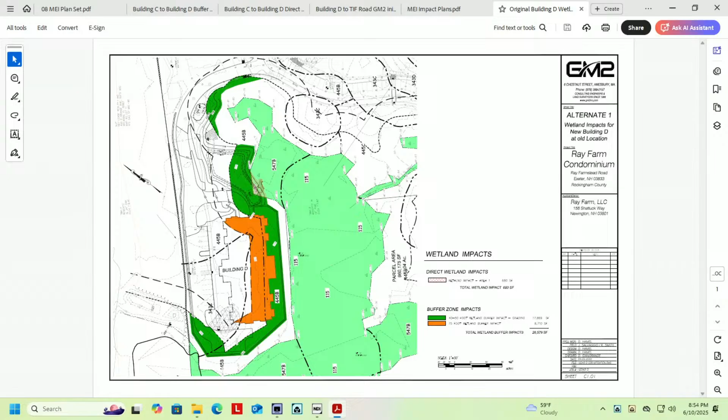Just to clarify, there was a little bit of confusion because the criteria as listed in the application differs from the order of the criteria that our current zoning lists. But just to catch us all up, you already addressed current criteria 1, proposed uses permitted. Criteria 2, no alternative design which does not impact a buffer or is less impactful is feasible. You talked about that. The wetland scientist, functions and values, concluded the impact is not detrimental to the system.

And 5, skipping 4 for the moment, the proposed use will not create a hazard. And 7, where the use is temporary, restoration is proposed. I don't believe you discussed 4, 6, and 8. You kind of touched on 6. Yeah, we were just starting 6. But do you want me to go back and read 4? Yeah, just so that we're consistent. Yep.

So, Brendan, 4 is that the design, construction, and maintenance of the proposed use will, to the extent feasible, minimize detrimental impact on the wetland or wetland buffer, which was kind of touched on in others, but I'd like to address this one directly. Yeah, there's a good amount of overlap with these, I'd say. One is avoidance, the other is minimization. Yeah.

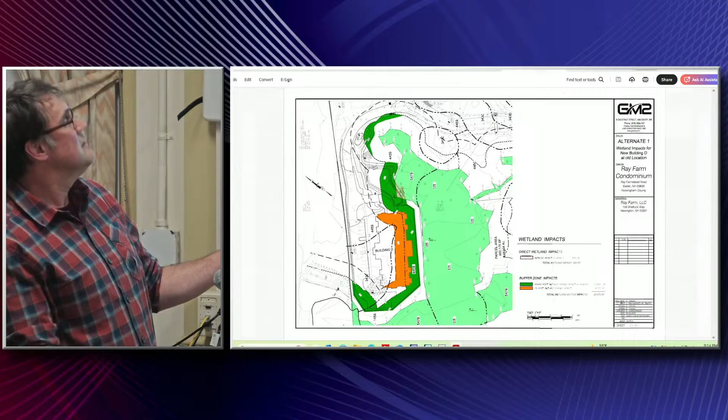The only place, other than the road, where we're gonna have mostly walls, the only other place where we have buffer impacts is this connecting walking trail. And as we discussed, unfortunately, we can't go through all the details. All we can do is represent what the intent is going to be in the design in that area, which would absolutely include exactly what we're talking about here, which would be restoration of any impacts that weren't necessary for whatever is ultimately approved for the trail itself. And I believe that would be the design goal for something like that anyway.

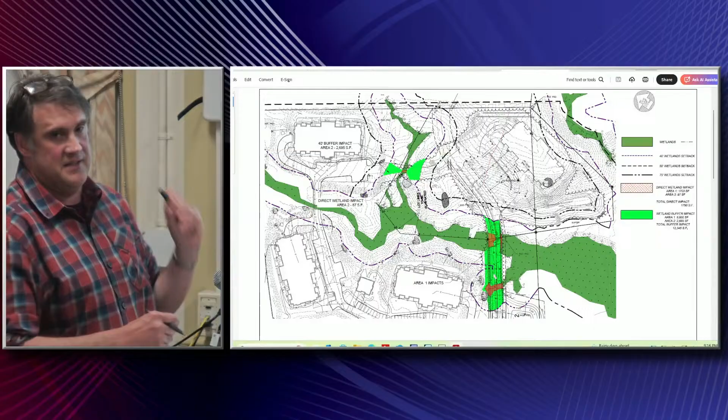I don't think what's desired is a cleared out alignment through there. But as far as wetland buffer everywhere else, there's no other impacts. So there isn't any other opportunity to do what we're talking about other than pointing out that we have avoided the wetland buffer impacts previously associated with the old building D.

But there's nothing binding though, right? There's nothing that says in 10 years, if we don't put something in here, it's gonna prevent people from building on the original site of building D, right? And so that's what I would like to see, something that makes that not a possibility in the future. Yeah, unless I'm getting confused, I think that was a separate item you were discussing. She just said in perpetuity the HOA can't build on the original building D site. Yeah, and I feel like that's perfectly acceptable, reasonable. Yeah, and we can condition that.

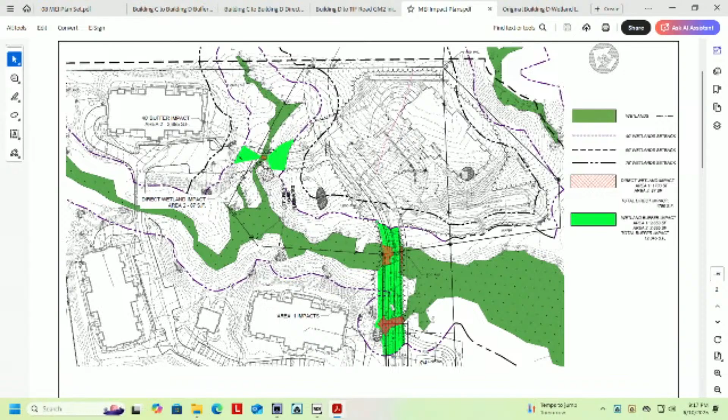But then the slopes, Sean, is there a certain area? Is it that stormwater feature on the bottom part of that figure by the crossing? Is that the area you're looking at? That area right now is, I would say, wet. It's not in good condition in terms of restoration. I kind of don't know what to do with that because there's going to be a bunch of rock presumably poured in there and then paved on top. Okay, so that'll be completely different. I think you answered one part of my question, which was, it does say within the buffer, right? So all these places you came right up to the buffer. Well, that's what it calls for. You're allowed to do that.

Okay. But that area in our picture to the right side of building A, where it says Area 1 impacts, that's the part I think is getting eroded badly, all around that whole building. Yeah, just where you see the sloping down, all of those elevation lines that are steep. I wasn't there when they did it, but presumably it's been bulldozed up into that steep slope. I'm skeptical, and that is within the buffer, if I'm reading the map correctly, right? Yes. But that was already approved and done, so.

So currently, a landscaping plan is not on file, right? There is one provided. Oh, there was a landscaping plan. Yes, it's a draft, but it is there. Were there any areas for supplemental planting you think the applicant would be supportive of within the buffer? You identified native seeds, perhaps along the trail. Is that what you're looking for? I guess I had two things. One was the question, which has been answered, because it matters where that buffer line is drawn. It doesn't say you have to restore the slope except within the buffer. That's been asked and answered.